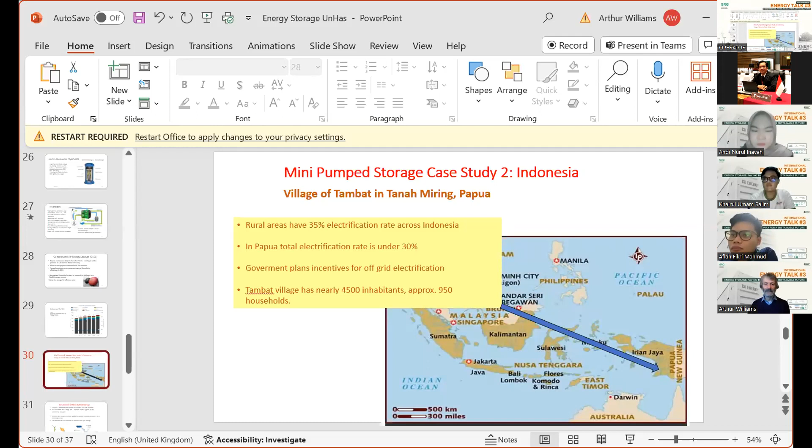Okay, so now I will invite you to start the presentation. Time is yours. Okay. So, right. Sorry, I need to find my correct slide. Sorry. Yeah. Sitting here. Yeah. Yes, is that all working? And you can hear me okay? Yes, Mr. Arthur. Yes, good.

So, I'm going to talk about energy storage, starting off looking at the changes in the electrical grid. I'm going to use a lot of examples from the UK grid, because it's a grid that I know about, but also in some ways the UK grid has been at the forefront of changes in the way that the grid has worked. It was really the first grid to become deregulated, in the sense that it had an electricity market set up. So the role of storage on the electrical grid in the UK is linked quite a lot to the way that the electrical market works.

So I will talk a little bit about the electrical market and the overall changes on the grid, and then have a look at different types of energy storage, what's available and how they can be used. And then at the end, just quickly, I'm going to go through some energy storage research that I've been involved in with different research students over the recent past.

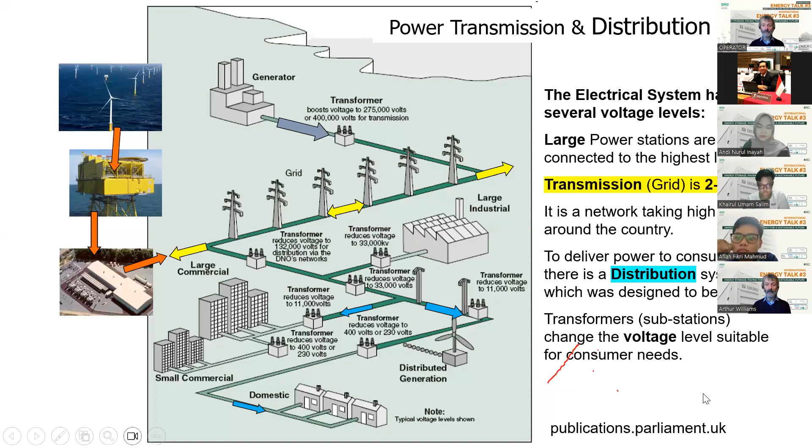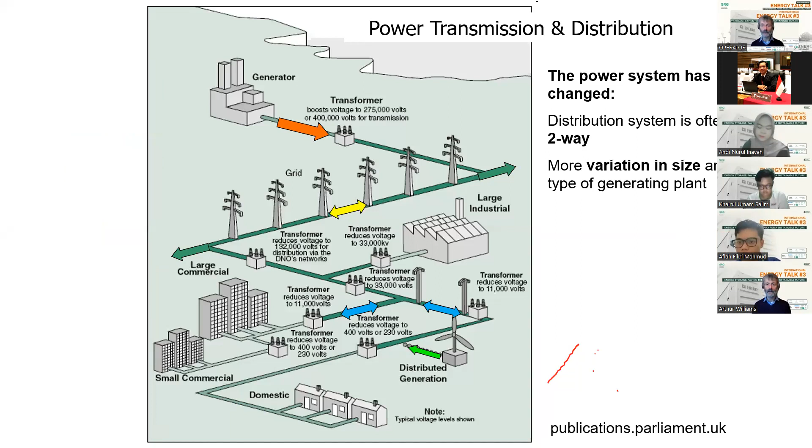But there are also a lot of renewable energy systems which are connected in at the distribution voltage level. They might be small wind turbines, they might be PV panels on homes. And what we have now is some of the people or organizations that would have been consumers of electricity are now what we call prosumers. That is, they produce as well as consume electricity.

And this causes some issues for the grid, because we now have a distribution network which was designed for single direction flow of energy from the transmission system to the consumer, and at times it's working as a two-way system. So at certain times there will be electricity that will flow from the distribution system back up to the transmission system. This is not how the system was designed, and it can cause some issues in terms of voltage levels at the local level.

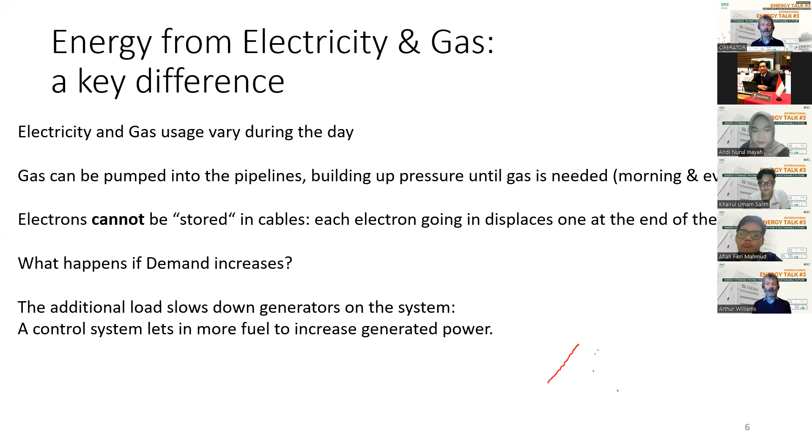So we have a control system that can balance the power supply and the power demanded. Of course, at some times that may also have big changes. So the grid operator actually needs to predict what load demands will be in order to schedule the power stations to give the right input to the system.

And they use weather forecasts, TV schedules are quite important, and actually load prediction can be quite difficult, particularly for smaller grids where there's less averaging on the system. And energy storage can then be used to help even out these changes between energy demanded and energy supplied.

Then there are issues with the green renewable sources, particularly those that are intermittent, and some of those are not only intermittent but unpredictable. So wind power, for instance, is difficult to forecast exactly how much wind power will be produced at any one time. So renewable energy resources generally cannot be used to respond to changes in demand.

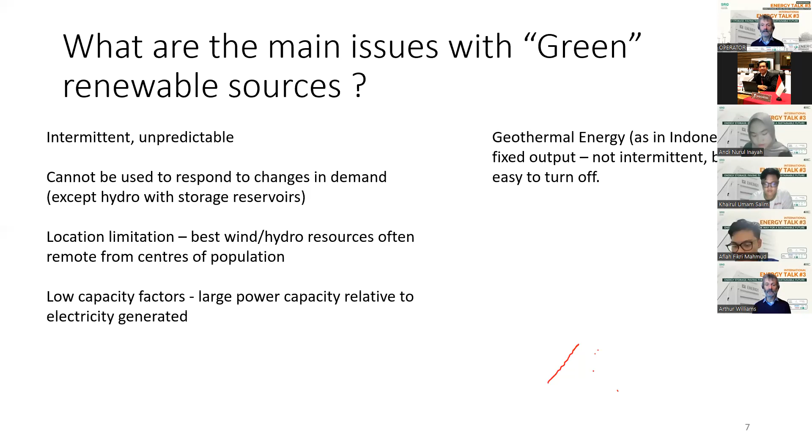So in the UK, we have made big changes over the last 20, 25 years to our electricity system. So we used to rely for about 40% of our power, back 30 years ago, on coal-fired power stations. Virtually all of those have closed now. You can see that our coal supplies less than 2% of power in the country, and the rest is split between gas and renewable energy.

And so that renewable energy in the UK is mainly wind, some solar, and some biomass. We also have nuclear power stations, which you don't have in Indonesia. Nuclear power stations, also like the geothermal, are not easy to turn off. So they are a bit of a problem in terms of matching supply and demand. We have a very small amount of hydropower, less than 2%.

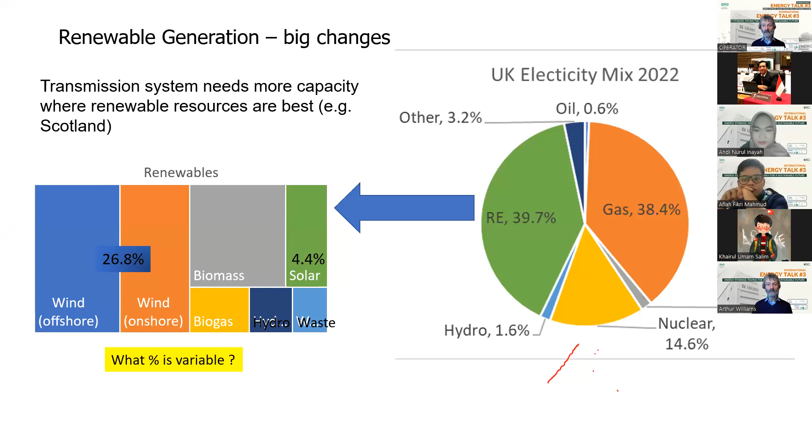And if you look at this, it means that on the UK grid, if you count up the wind power and the solar power, more than 30% of our electricity generation is coming from variable resources, which depend on the weather. So the solar and the wind. And we still need to be able to balance the grid with this relatively high amount of renewable energy. And of course, the renewable energy percentage is increasing all the time.

So you can see over time, this is looking back to 1998, and each of these humps is a winter season, and you can see how coal has been phased out. Gas has continued to be an important generation resource, and in more recent times, many of our nuclear power stations have closed over the last 15 years. And so that amount has gone down, and replacing that, we have solar and wind and bioenergy. And also, quite significant for the UK, we have interconnectors to the rest of Europe, and we import electricity.

You will also notice that the demand for electricity, particularly over the last 15 years, has actually been going down. This is mainly due to energy efficiency, and also that some manufacturing industry in the UK has closed and has moved elsewhere in the world. So that's quite a different case compared with Indonesia, where you have year on year increasing demand for electricity. And actually, in the winter time, we tend to get more wind, and that helps to meet the increase in electricity demand in the winter time.

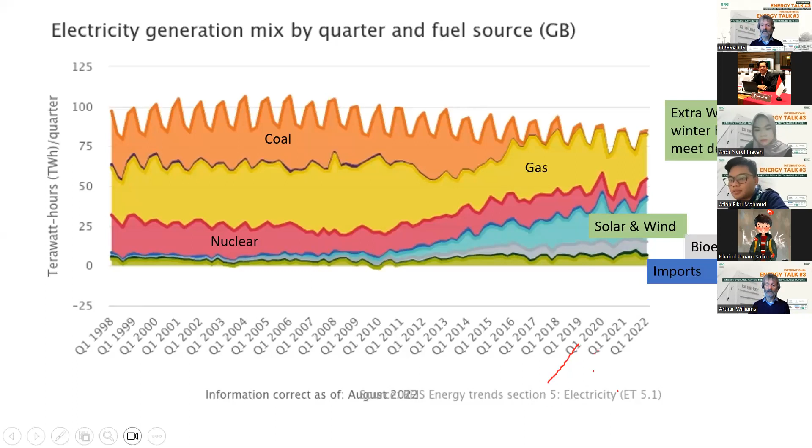So what are the solutions to match these variable loads and the variable generation? Obviously, one is energy storage, but there are also other things that we can do and are done on the UK system. One is demand side management, where you actually control the loads and get people and industry to turn off loads at times of peak demand. Flexible backup generation, mainly in the UK that's gas powered. And if we could, also reduce reliance on less flexible generation like coal and nuclear.

There is also the possibility that when we have too much power generation on the system, we actually have curtailment. That means that wind farms may be switched off and disconnected when the demand is low and there is a lot of wind on the system.

And the last thing is that we can import power via subsea interconnectors. I believe that in Indonesia there is an interconnector in the pipeline between Indonesia and Malaysia, which is planned. So Indonesia might also be in that situation, to be able to import power at times when it's needed, or export it.

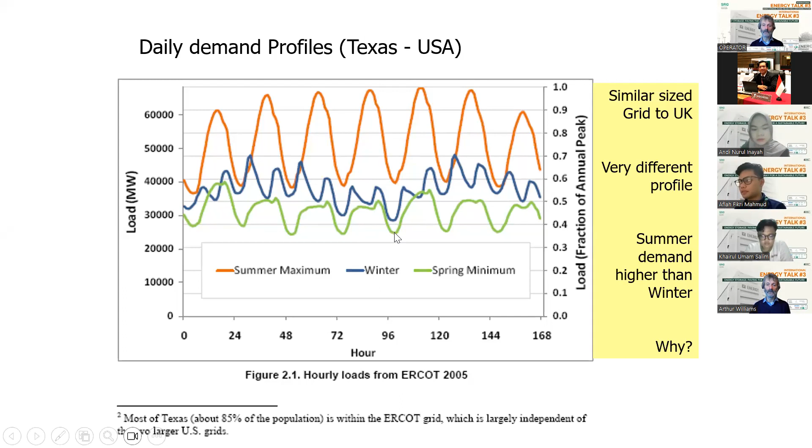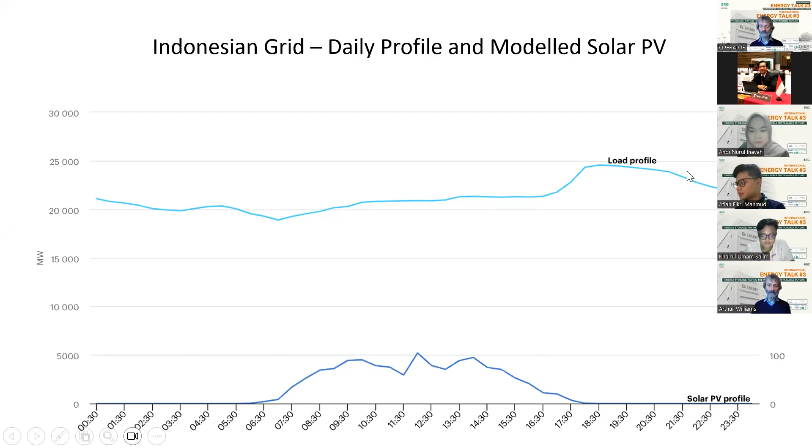And unfortunately, that doesn't match very well with the solar profile that you might get. So here down the bottom, you can see an example of a modeled solar output. So if you were to have a lot more solar on your grid, it wouldn't necessarily help to meet that evening peak time. And we have the same problem in the UK. Solar during the middle of the day and then the highest peak in the evening time. So this is again where energy storage comes into play.

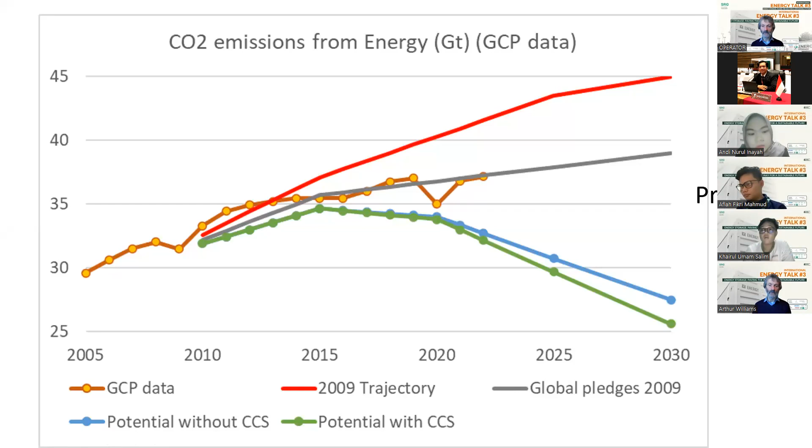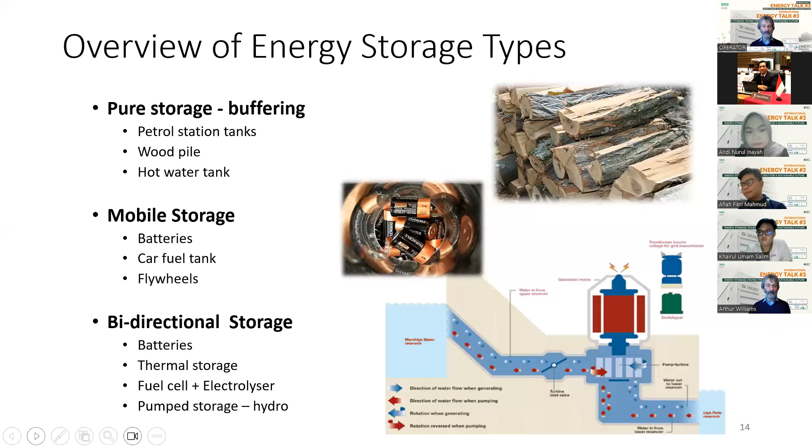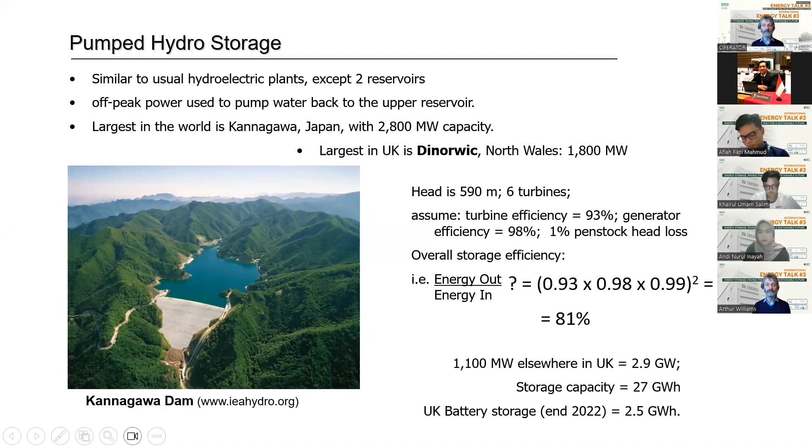And in the UK, we have 2.9 gigawatts of pumped hydro storage, with a total storage capacity of 27 gigawatt hours. The battery storage in the UK is currently only 2.5 gigawatt hours. So you can see that's only a tenth of what the pump storage is. But actually, battery storage is growing in the UK system.

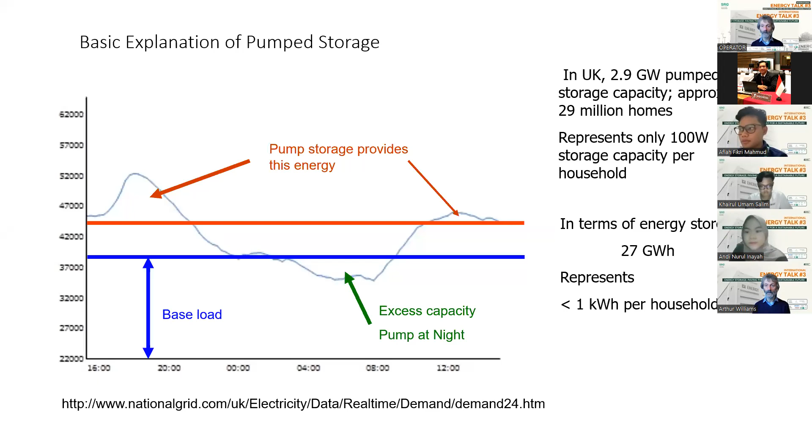So pump storage is basically using excess electricity at night and using that to meet the demand at the peaks in the daytime. Actually, if you look at that 27 gigawatt hours of storage, that represents a bit less than 1 kilowatt hour of storage per household. So that's how much storage we have in our grid, and 1 kilowatt hour is quite a reasonable size battery.

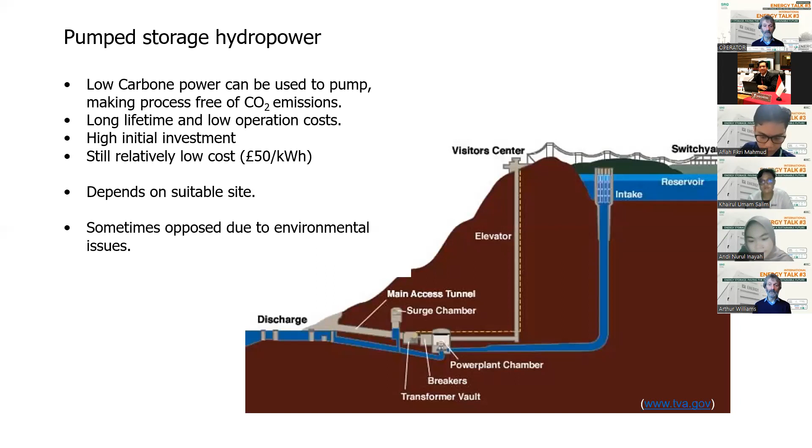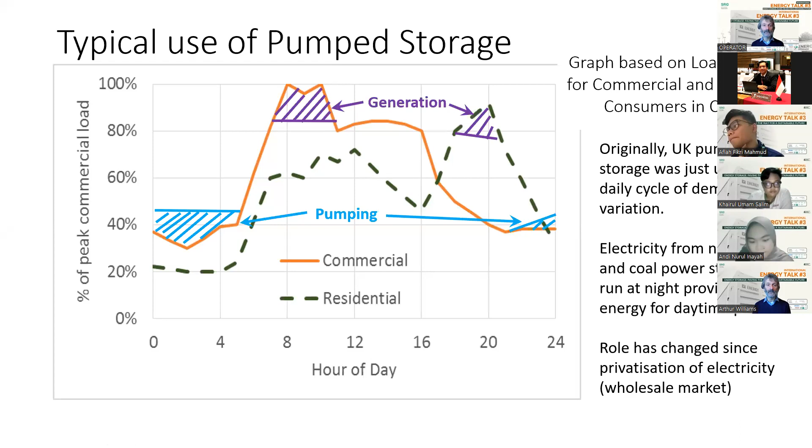The system forecast that the demand was going to be much higher than it actually was. This was a day in May; probably what happened that day was that they predicted it to be cloudy, and it turned out to be sunny. That means all the local solar systems on people's houses and on industrial sites suddenly were covering their local demand, and therefore there was less demand on the system than was predicted. And then the price suddenly drops because there is more power on the system than is actually required.

And it's important to think about storage in terms of big grid storage, but also local storage. In the UK, there are quite a lot of incentives for people to have storage locally, because if you have storage and your own generation, you can save money and also support renewable energy. So if you have your own solar panels on your roof and a battery in your house, you can use your solar for your own electricity over longer periods.

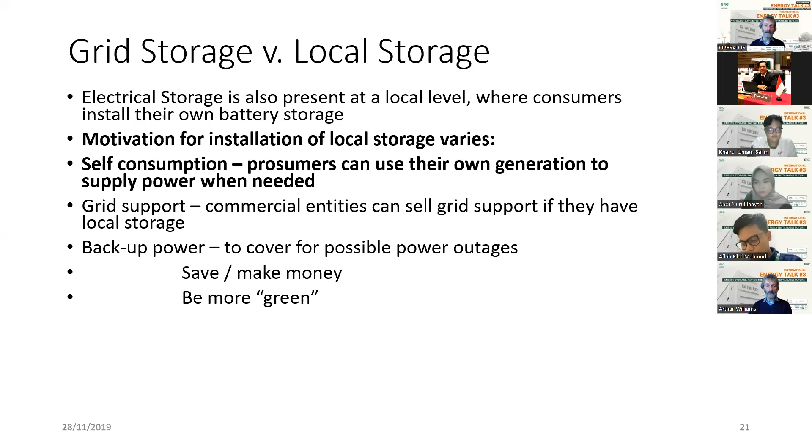So options for longer term electrical storage in terms of batteries: there is a thing called a flow battery. This is a technology which is now available commercially, but there are only one or two examples around the world where it's been implemented. It's basically electrochemical storage, but with flow in the system, so that rather than electrical recharging, the recharging can be done off-site, so this system is good for larger scale storage.

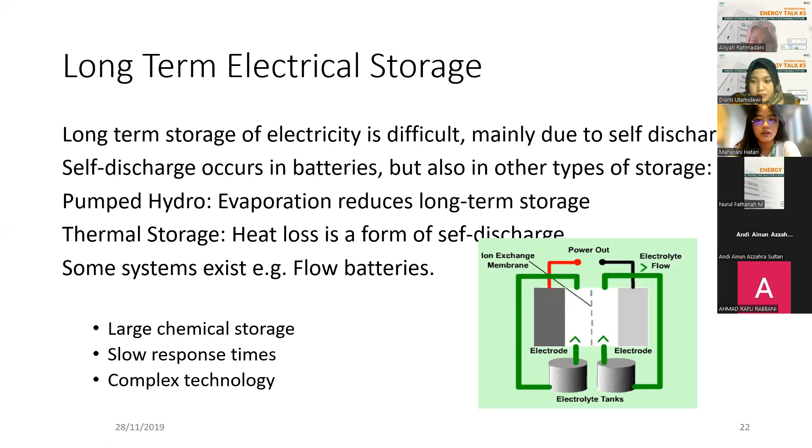There's also a possibility for some thermal storage, and in all of these cases, there's self-discharge. Batteries don't hold all of their electrical storage. Pumped hydro, water evaporates. Thermal storage, heat is lost over longer periods of time.

Batteries are now becoming used for grid storage, and they're good for a very large range of time periods. So they're good even for storage at less than 1 second intervals, where you might have sudden glitches on the electricity system. You can actually use battery storage to cover those in time. And in general, at the moment, the most popular is lithium-ion battery storage.

And in the UK, grid-connected battery storage increased from 0.5 gigawatt up to 1.7 gigawatt in the last few years. But also, in the UK, we now have 600,000 electric vehicles. And if you think about each of those electric vehicles having a battery of 30 kilowatt hour, which is about average size for a car, that means that we have 30 times 0.6, we have 18 gigawatt hours of storage in those vehicles.

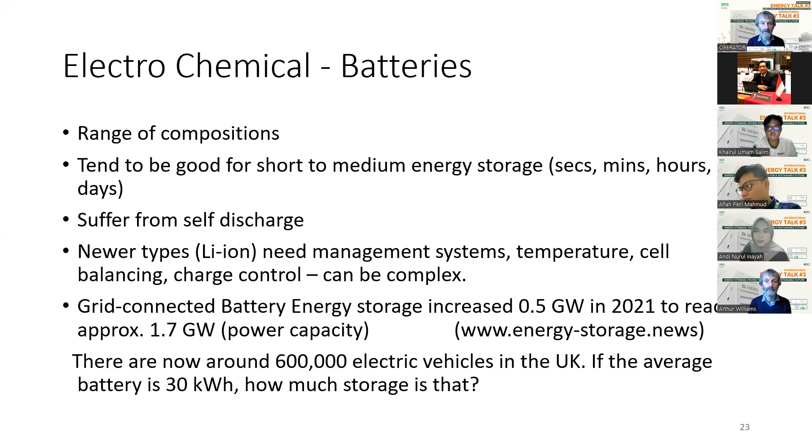One thing that's quite interesting is how lithium-ion technologies have developed. So this is looking at storage capacity per unit mass on the vertical scale and per unit volume on the horizontal scale. And this was based on lab data back in 2009. And commercial batteries in vehicles are now off the graph. So in the last 10 years, the technology has developed significantly from where it was in the lab to actual commercial technologies. So we're able to store more power in the same volume and the same mass of battery.

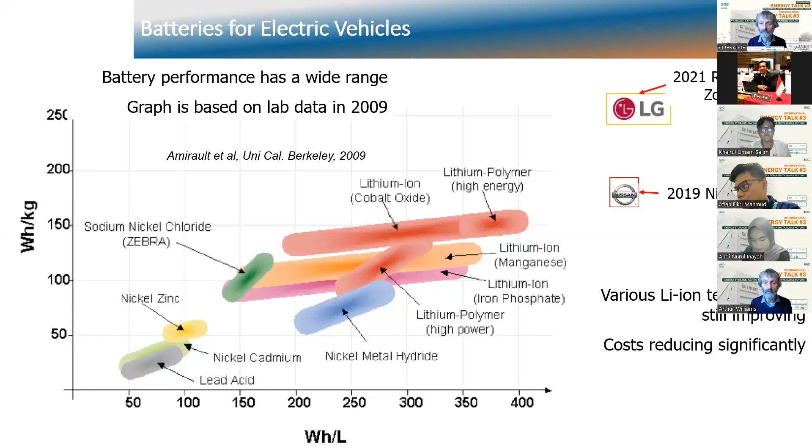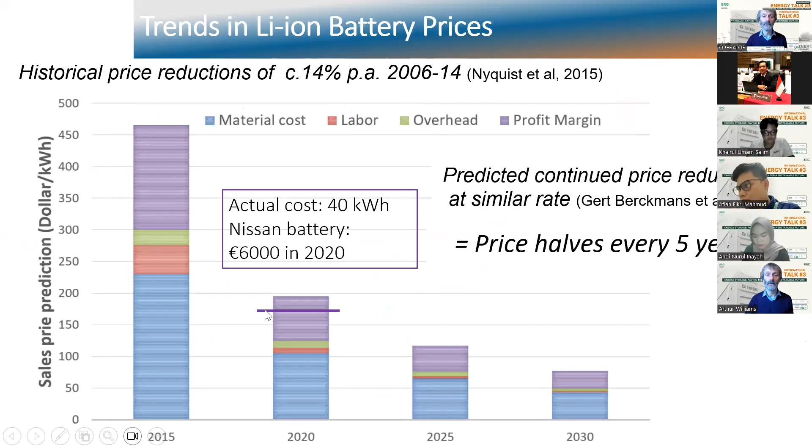And the other thing is that costs have been reducing significantly. So the price of lithium-ion batteries has been basically halving every 5 years. And you can see that the original chart is a prediction. Actual cost of a battery in 2020 was slightly lower even than the prediction. So the cost of lithium-ion batteries has been falling significantly, and that means that they are now starting to be cost-effective storage backup on the grid.

And where are we here? Oh, yes.

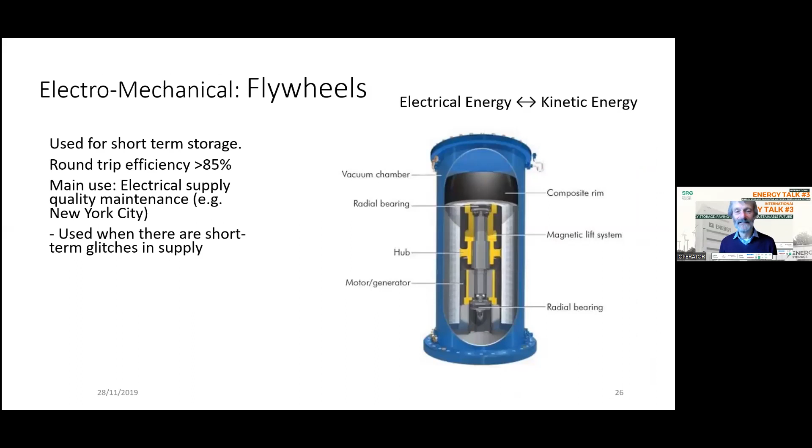Flywheels. There are examples of flywheels in use. So these are sophisticated devices. They run in a vacuum. And basically, they have a reverse running electrical machine, normally a permanent magnet machine. So you can get high efficiencies, more than 85% efficiency. And they can be used for quite short-term glitches on the supply. So there's one operating in New York. Actually, surprisingly, if you want to find out where flywheel technology is really developing, it's used in Formula One motor racing. So the racing cars have flywheels in them as energy storage. So this is another option for short-term grid storage.

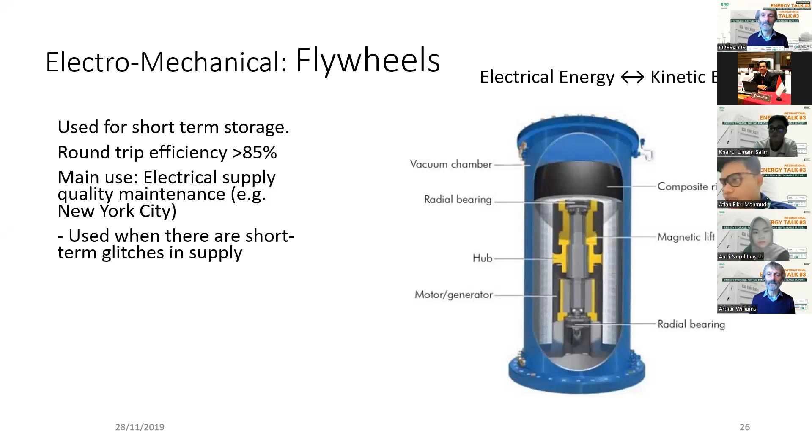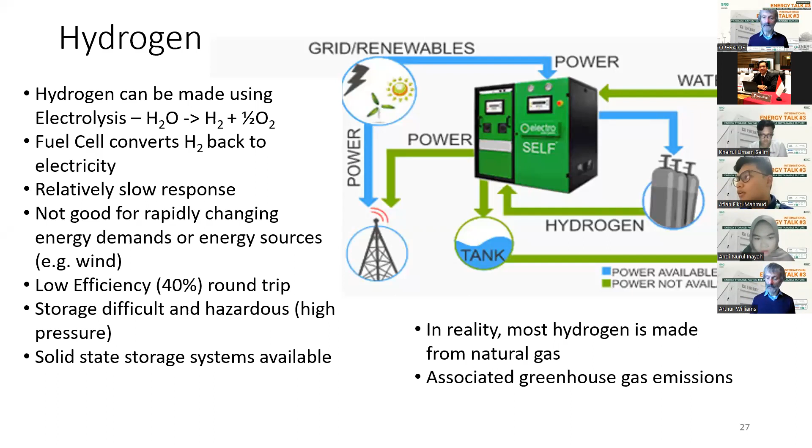So those are some of the options for grid scale energy storage. But to my mind, the two key ones which are going to go into the future are batteries, and particularly use of batteries in vehicles for grid backup, and pumped hydro.

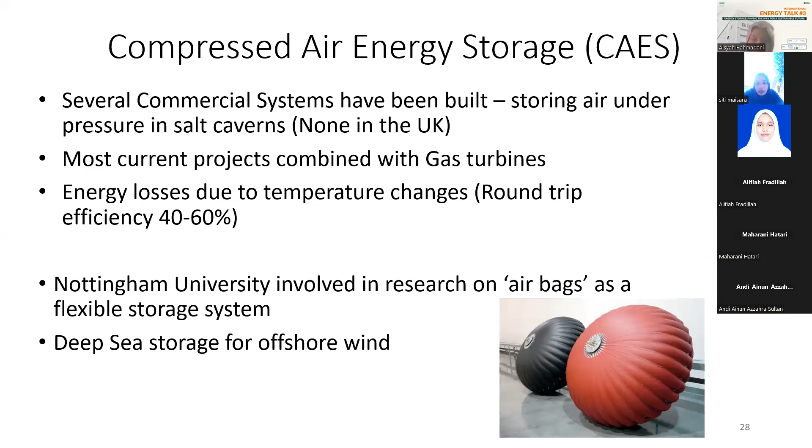Well, one of the things that I noticed about the Indonesian grid, because you have a large amount of coal on the system, the CO2 emissions per unit of energy are quite high. And that means that actually in Indonesia, in terms of CO2 emissions, using electric vehicles is not that helpful, because you have such high emissions from the electricity that you're using to charge the vehicle that you're not getting the benefit that you would in a grid with much more renewable energy on it. But who knows, in the future, if you can get large amounts of solar onto the grid, then obviously electric vehicles would make more sense.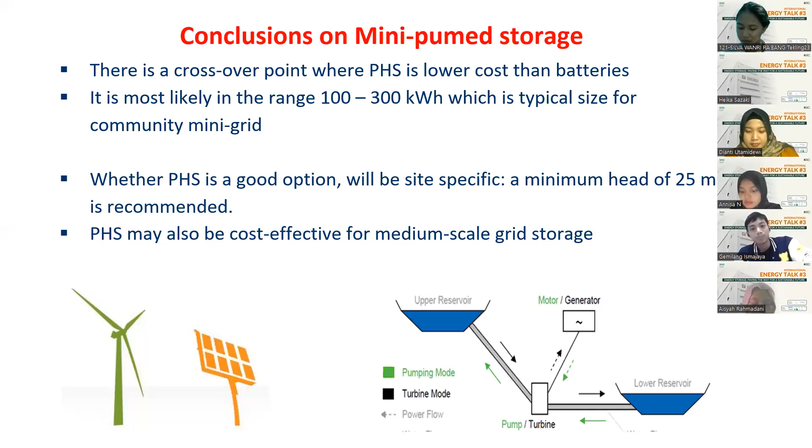And some of the other work that I've looked at is what happens when you have solar home systems, and when you model systems using HOMER, you have an issue that HOMER models systems on 1-hour data. So it models the load on hourly blocks, and it models the generation on hourly blocks. Unfortunately, because of the actual changes in solar systems and wind systems, it's not always very accurate. And we found that 5-minute time steps would eliminate the kinds of errors that you get from averaging.

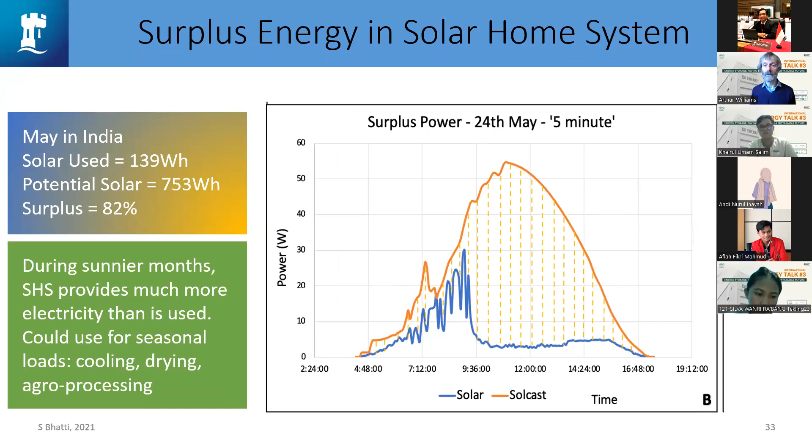And then we also looked at what would happen if you had solar home systems. One of the issues is you have a panel which is big enough to supply the load all the way through the year, but at certain times of the year you have more sunshine and maybe lower load. And in this case, the battery is charging up with the first solar in the morning, and then it basically wastes most of the solar energy in the rest of the day. So we were looking at, could you use that extra solar energy for things like running coolers or dryers or agro-processing equipment? But that's really for off-grid. Obviously, if it's connected to the grid, you export that power to the grid.

And then finally, a PhD looking at community energy. So a whole lot of houses, some of which have got solar panels on them, and some of them have got batteries, and you connect them all together and basically use the local distribution grid to help even out the generation and demand within these households.

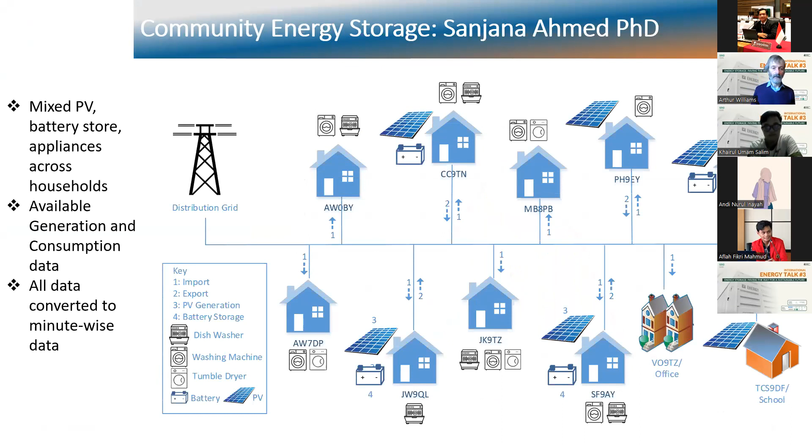And in this case, it was modeled every minute, and the system used a time of use tariff, which kind of matched the load on the system. So you can see that these kinds of time of use tariffs are actually available now in the UK, where you have very cheap nighttime electricity, only 5 pence a unit.

Current prices are higher than this. This was done a couple of years ago. Then standard power at 12 pence a unit, but at peak time, in this case between 4 and 7 in the evening, the price is much higher. It's at 25 pence a kilowatt hour.

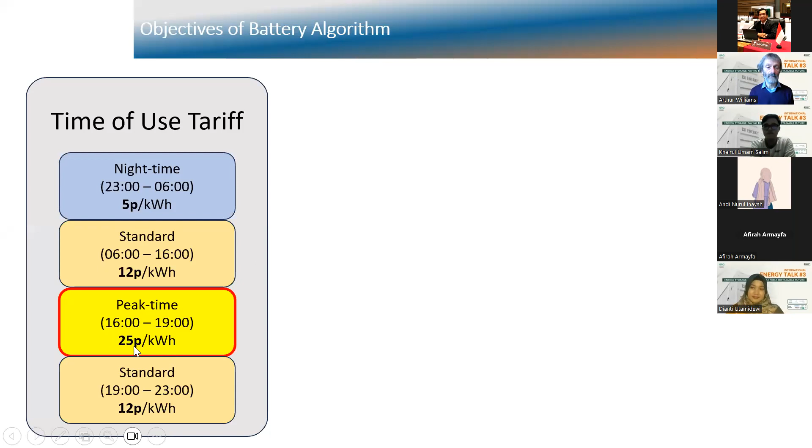And you can then have a battery energy management system, which tries to remove all the load coming in from the grid in that peak period, so you don't buy any expensive electricity. And it also avoids exporting electricity from the PV panels to the grid. Try to put all of it into the battery.

And then there's an issue of how big a battery do you need? And the PhD was basically looking at what's the best way to calculate the battery size to optimize the peak energy cost saving. So yeah, those are some examples of research on energy management.

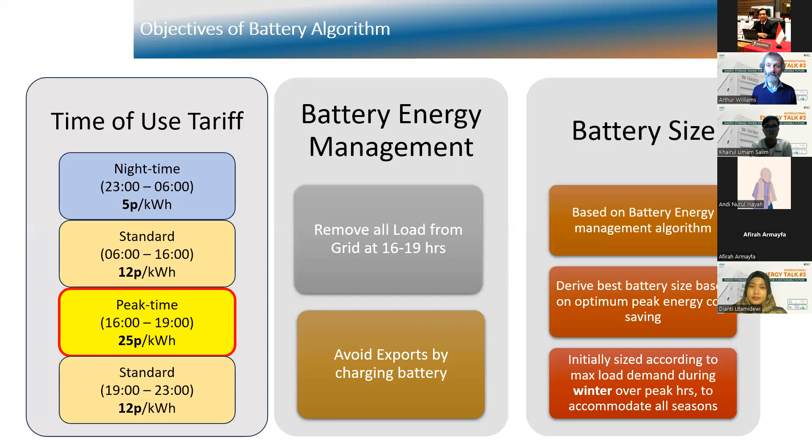So finally, just a quick summary of what I've covered. As renewable energy input to the grid increases, we require more storage on the grid. Pumped hydro is at the moment the most cost effective for grid scale storage, but it's limited by the sites where you can do it.

Batteries are useful particularly for faster response times, for shorter changes in output and demand on the grid. It's a modular technology, costs are still falling, it has high efficiency, and is really important in stabilizing the grid when you have variable supplies like solar and wind. And also useful at household level if you've got solar panels on your house.

And the other technologies are really useful for specific applications, and in some cases they might be dedicated to storing power alongside a particular generation.

Okay, so I'm going to, sorry, no, just do that. I want to close my sharing now. Stop share. There we go.